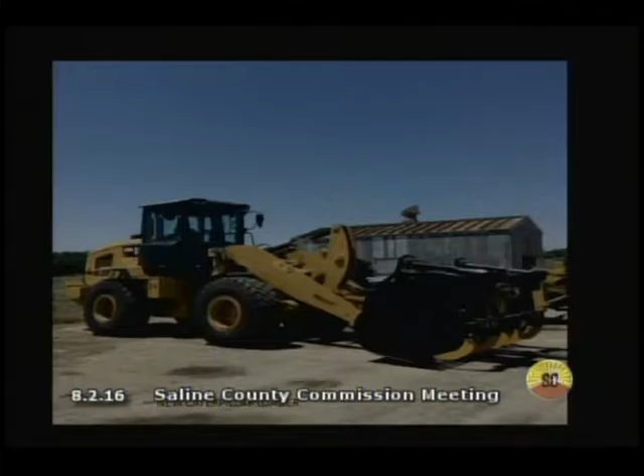We did get our new loader. It's a nice looking Cat 930 loader, and there's a grapple attachment on the front that is removable. We've taken it off, and we'll use it for aggregates this year, and then come winter, we'll put it back on and start using it for tree work.

A little bit of the activities by the rural operators. What you're looking at here is a ditch cleaning layback. It's where we take the motor grader and just put the dirt back into the field. Very effective way to do ditch cleaning in the cultivated parts of the county, saves a lot of labor and time.

This is some reshaping and recompacting of Ohio Street from Waterwell Road to Minna Road. During one of the many rains we've had lately, it got tore up from heavy truck traffic, so we had some people go over there and reshape it, putting the crown back in the road.

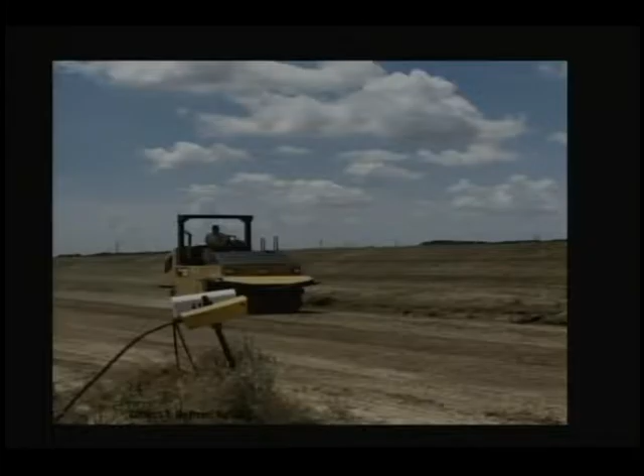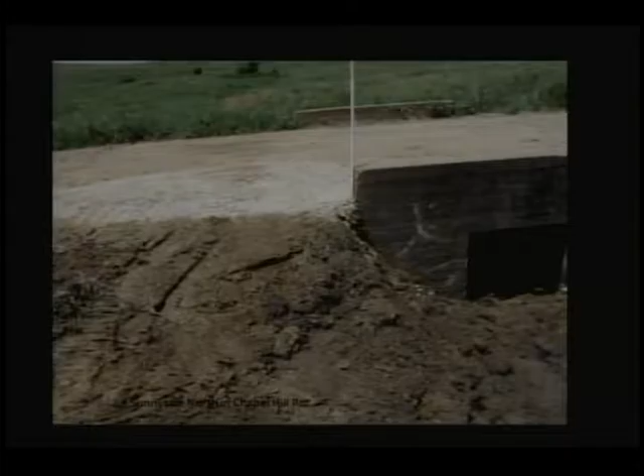Was that a new water truck there that we got recently, or have we had that a while? No, that's not a new water truck, we've had that quite a while. Yeah, that's an old milk truck. That's what it is. And we went and rented this piece of equipment, which is a pneumatic roller from Foley Equipment, to accomplish that, to seal the surface.

This is a wing wall repair on a box. The water doesn't come straight into this box. Underneath there, we buried a couple of those concrete Lego blocks to keep that from washing out.

This is on Country Club Road west of Simpson. I got a call about some overgrowth on a bridge structure there underneath, so we went over there and did some temporary work to clean the trees out and make the signs visible. We'll have to go back this winter to finish up, but at least you can be able to see through there now.

This is some asphalt work that we did on the overlays on Kip Road. When they go through there and pave, we go back and get a little asphalt and repair those drop-offs.

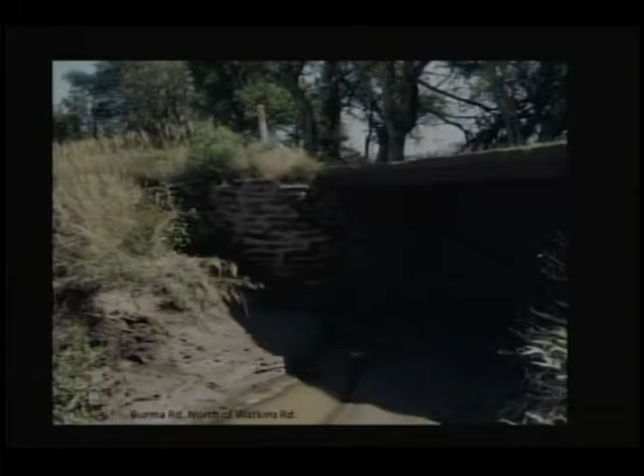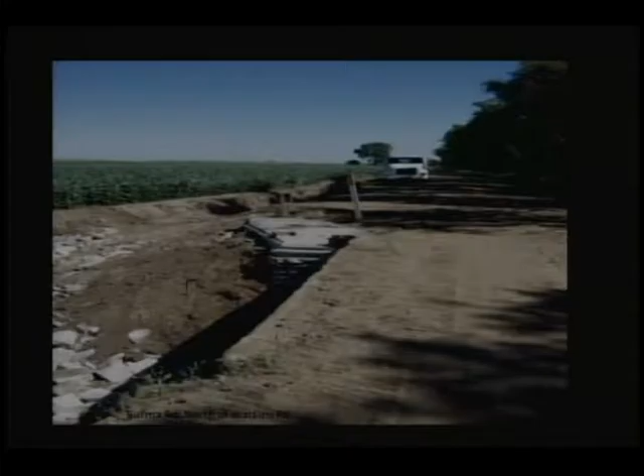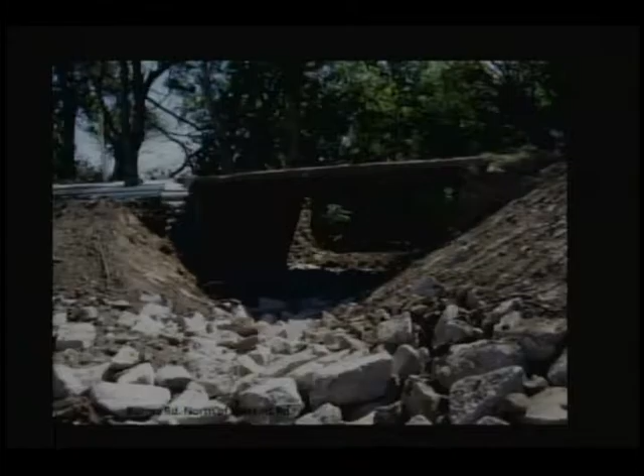This is a wing wall on a box on Burma Road, north of Watkins. It's eroding, cracked, and failing, about ready to fall off. We had some old H-pile in the yard, so we sunk some holes about 9 feet below the flow line and welded the H-pile together, put some decking in front of it, and poured concrete between the wing wall and that decking to repair it, then put some rubble in the bottom.

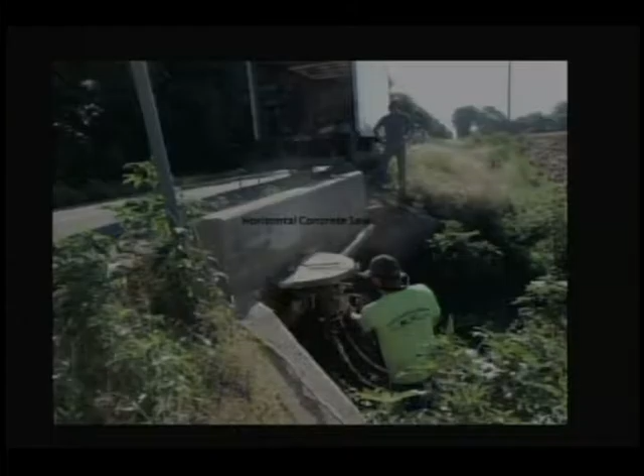This is some head walls on State Street. There were 2 of them at this location. We hired a contractor who has what they call a horizontal saw that they can attach. These head walls were built as part of the structure, so we hired them to cut them off level with the road surface, so when a vehicle does exit the roadway, those head walls aren't their problem. Just some safety improvements we made on that stretch of road.

This is a concrete culvert at Tamara Lane and Parsons. Since it's been wet, wherever we have these concrete jointed pipes, when you get a lot of heavy rains, the bells break and create a lot of potholes. So when we get the chance, we replace those with a continuous corrugated metal pipe.

This is another one, same thing - concrete pipe separated at the joints, on Fairchild south of Sundgren. We go in there and clean away from them to get the flow from the culvert.

This is a box on Chapel Hill Road, just west of the bombing range. There's a box down in there that had started to separate, settle, and fail, and we replaced it with a corrugated metal pipe.

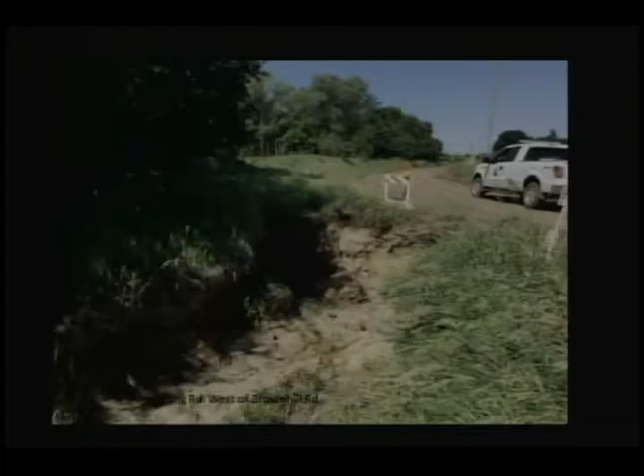This is on Armstrong Road, west of Brown Hill Road, an area prone to flooding, and it had washed out underneath that culvert. We had to dig that out, recompact it, and reset it.

This is also some of the damage from that same storm. We just went in there and refilled that, then put some of this rubble in there to help with the erosion.

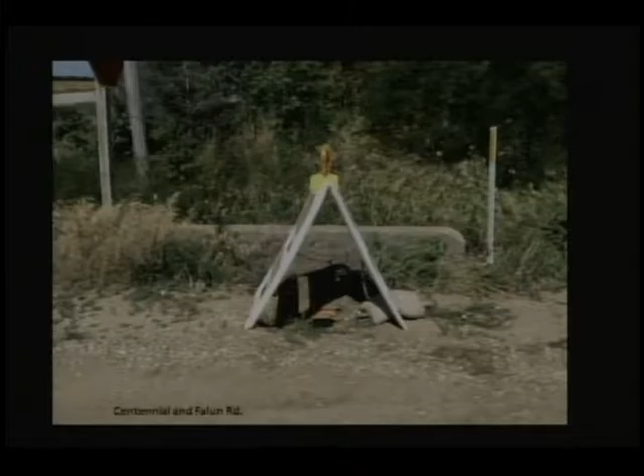This is on Centennial Road, another pipe that was failing. We went in and graded that.

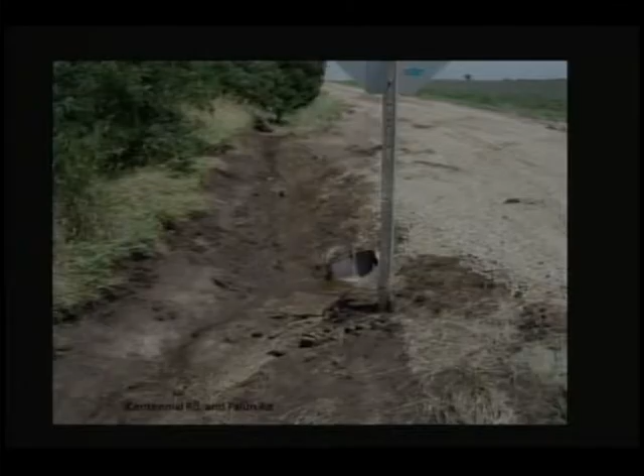This is also on Centennial and Falun. Here's a culvert that had been repaired at one time with an old aluminum sign, but since it had this concrete head wall on it, we decided it wasn't a good candidate for repair, so we went ahead and put a new culvert in, part of the safety effort to get rid of that concrete head wall.

This is on Cloud Street, west of Hedville. If you look over on the right, you can see the washed out culvert. When the heavy rains came through, it washed that culvert out, and we did a quick repair on the road. Engineering sized us a new culvert, but that one was too small, so we took the dirt out of the fields and rebuilt the road, getting the correct size culvert in there, so hopefully it won't flood across the road every time it rains.

That's just another shot of that. So we lowered the field and did a layback. When we do these laybacks, when you see our equipment out on other property owners' land...

We have their permission. We do talk to them. We don't just go out there and do it. We get their permission to perform these work activities.

This is an entrance on Humbarger, just east of Cunningham. I got a call from a gentleman, and he wanted to extend this culvert.

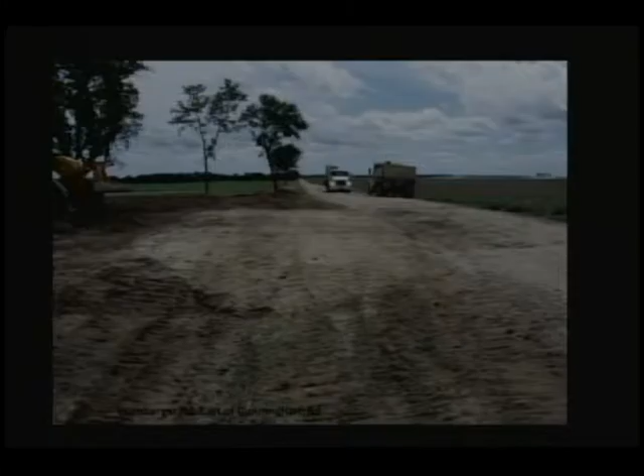And it is our responsibility if there's an entrance culvert in there. So looking at the terrain and the lay of the land there, we would have had to provide 24 feet, and then he would have had to buy a piece to put on it to make it as wide as he wants. But looking at the lay of the land and just moving this thing maybe 100 yards or so to the west takes that out of our inventory. So we built him what we call a plug entrance. It removes that asset, and nobody will ever have to go back and do any work to this again. So those are some of the things that we look at when we get these calls for culverts.

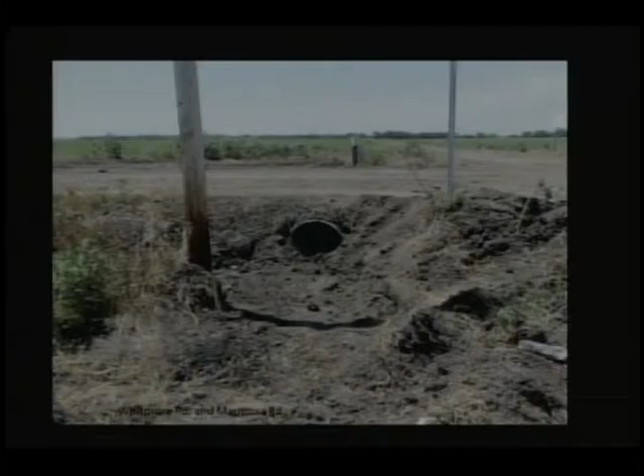This is a box structure on Whitmore, just north of Magnolia Road. We weren't even aware that this one was here. It wasn't on anybody's inventory. Something heavy ran over it and destroyed the top of that plank. But in talking with Neil, got him involved because he's the floodplain manager. This structure hasn't worked in, oh, I couldn't tell you how many years, but Neil, looking at the contours, decided that it would help the drainage in that area if it did flow again. So we used the existing concrete that this was laid on and just put a culvert back in there.

That's the end of my pictures. Does anybody have any questions?

When you get permission from a landowner, do you get that in writing? Yes, typically, not always. There are some people that you just know work well with you, and then others we have sign a hold harmless statement, yes.

Further questions? Go ahead, Commissioner. Where you're talking about that plug, was that like the one we went out to and took to the top of the hill, so it actually drained both ways? Is that a plug? Yes. Okay, I thought that was the case, because I remember when I went out to Lyle's and we did the same thing out there, I believe.

I'd suggest you get those signed anyway, because we've had two lawsuits over that. I'd get those signed, and it won't come back on you. I think it's pretty important. Yeah, I'd get it signed, because we've had problems in the past, and people that you think you would never have a problem with. I remember Mr. Tilburg, you know, we had that problem with that land, so I'd sure get that statement signed so we don't have to have all those insurance problems.

All right, Neil? These are the engineering division projects for June and July.

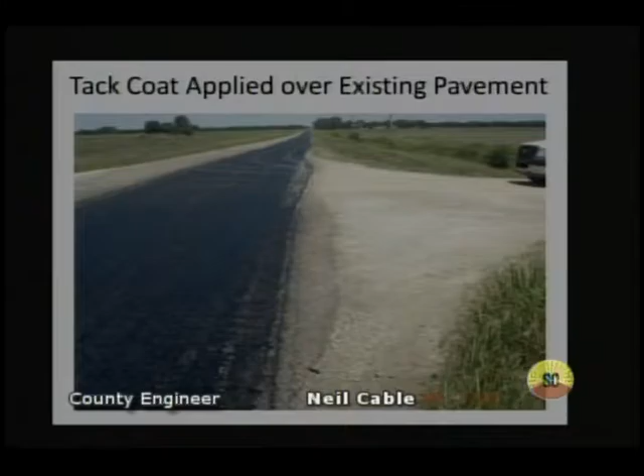Anyhow, just start with the contractual work that occurred during the last couple months, and go first to our contract with APAC Kansas for our asphalt work, project 165335. This work is on Kip Road, done in early June, and they worked up until about June 13th, I believe, when they pulled off because of harvest. They really haven't done any work since that time, so I'll go through these real quick.

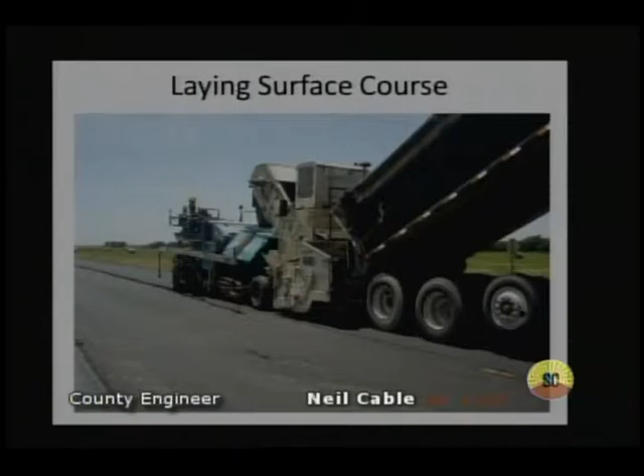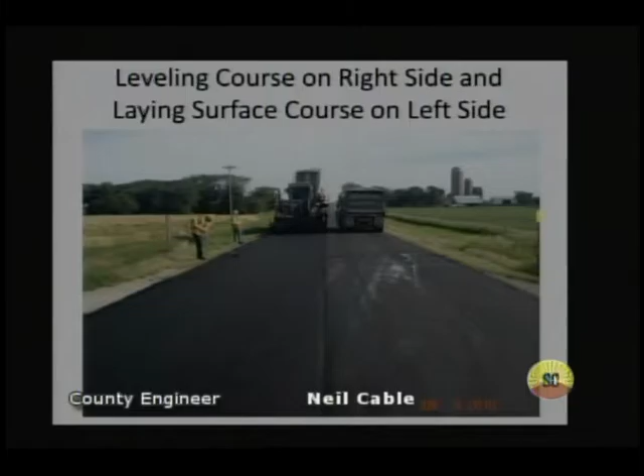You've seen this process before. It's just the application of the tack coat to the existing pavement. Then they do a leveling course to try and get out some of the unevenness of the pavement, and then come back with the surface, laying the surface course on top of the leveling course. I'll go through those pretty quick since you've seen the process before. It's always interesting to us, but a little bit repetitious, I suppose.

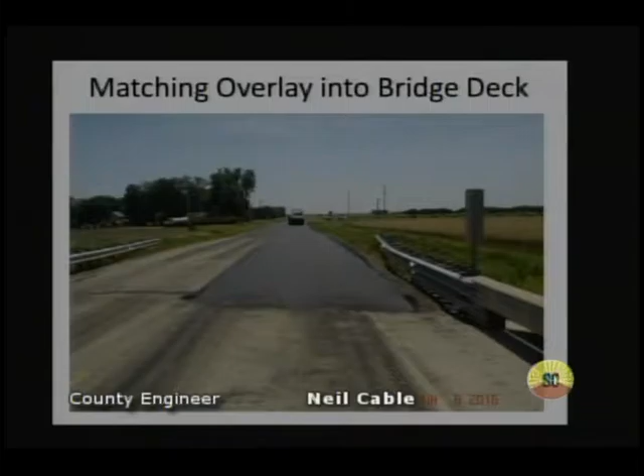Compacting the asphalt with the rollers, they went all the way from Country Club Road down to K4 Highway, about 8 or 9 miles. They matched the asphalt overlay to the bridge decks and did the radiuses, with a lot of handwork in the radiuses on that asphalt work.

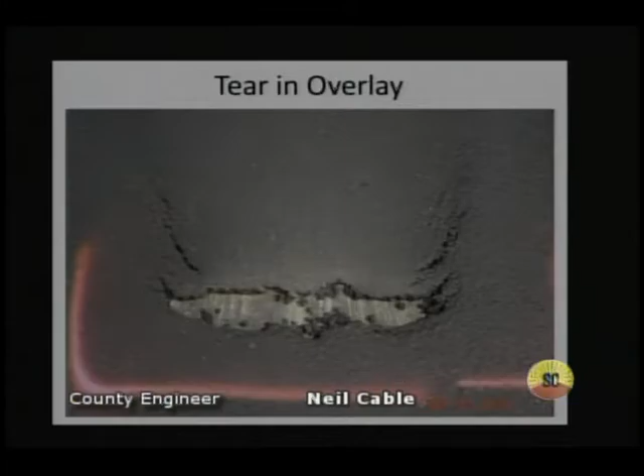We did have one area where we had some slippage of the asphalt overlay. We've had a lot of discussions with APAC as to why that occurred. It's not real extensive in 9 miles of asphalt work, but they are going to come back in and mill those out.

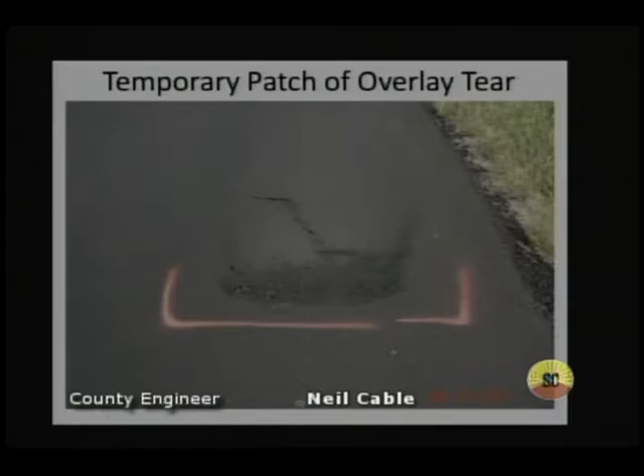There's several theories, and none of them are for sure. We used to use a different seal coat product years ago, and we've found some places where it creates kind of a slip plane at the old pavement surface, so we kind of think that might be the issue. Not entirely certain—it could be that the tack coat wasn't adequate in those areas. It's not coincident with any driveways or turning movements, just right in a straight section of the road, so it's not entirely clear.

APAC did some patching, and the county crews did some Dura patching in those areas, and they're passable right now, but they are going to be milled out and relayed. It's not extensive over that long a stretch of pavement, so I don't want everybody to think we had a wholesale failure, but we did have a couple of places that we're aware of, and they will be fixed.

Well, it was right there when all them big trucks were coming down there, and they just opened it up the following weekend. Yeah, after it more or less cured, but they pulled off pretty much and then all the trucks started rolling, so I mean we really kind of pushed that limit a little bit too much.

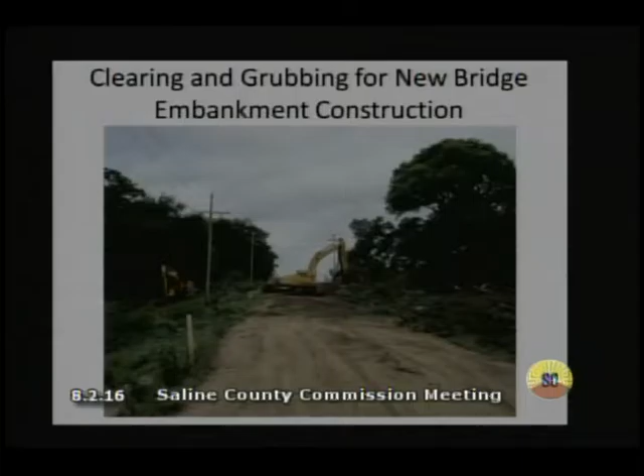This started on July 6th. They started clearing and grubbing out for the project. If everybody's been through that area, you know that's a pretty deep draw on Waterwell Road, where Spring Creek crosses Waterwell Road. They cleared and grubbed out the trees so we can build the road embankments. So I'll go through these pretty quick.

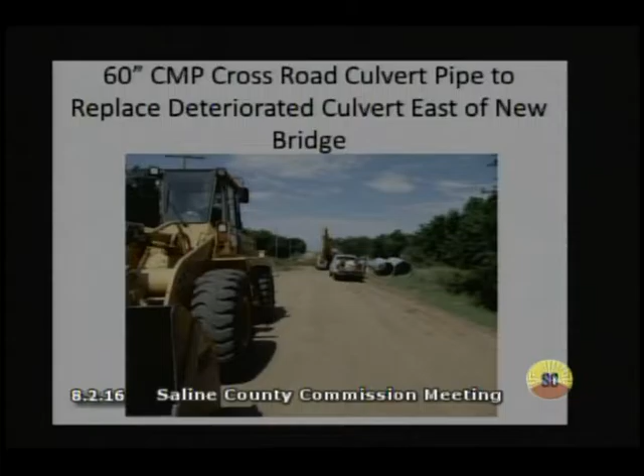We replaced the crossroad culvert pipe east of the new bridge site, significantly upsizing it—this is a 60-inch corrugated metal pipe. That's just laying the pipe, and the pipe's installed.

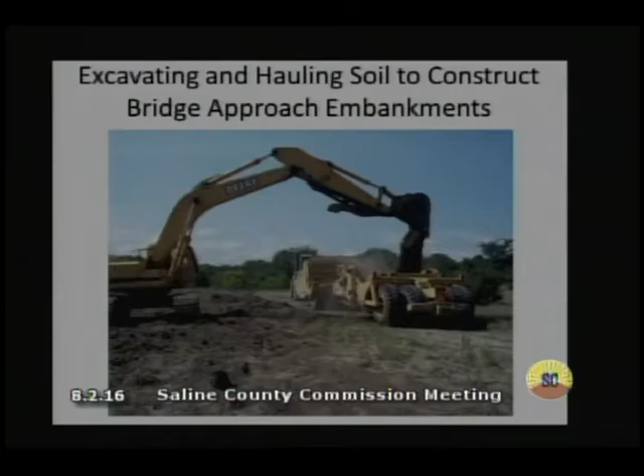What's going on out there right now is building the embankments for the approaches to the new bridge, which is going to take a lot of soil, borrow material hauled in. They've worked with the landowner to the south side of Waterwell Road and worked out an arrangement to get borrow from there. So they're currently hauling the dirt and building up the road. We have a few pictures of that—a lot of dirt being hauled in and the road being built up.

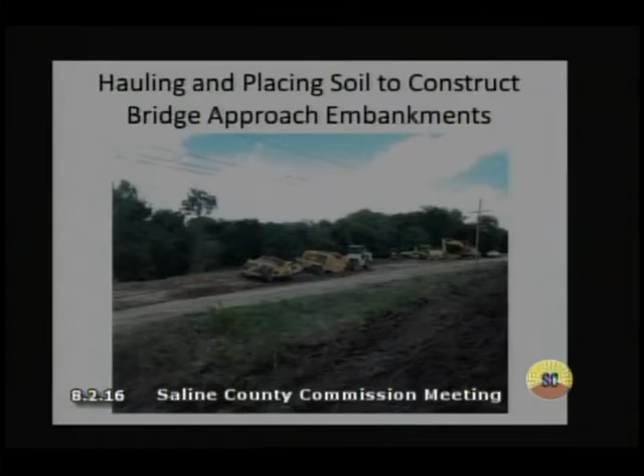That'll go on for a while longer before the bridge work starts, before King Construction actually comes in—this is their earthwork subcontractor.

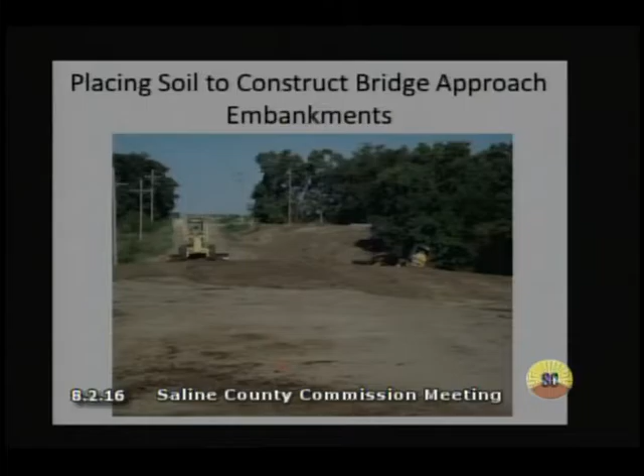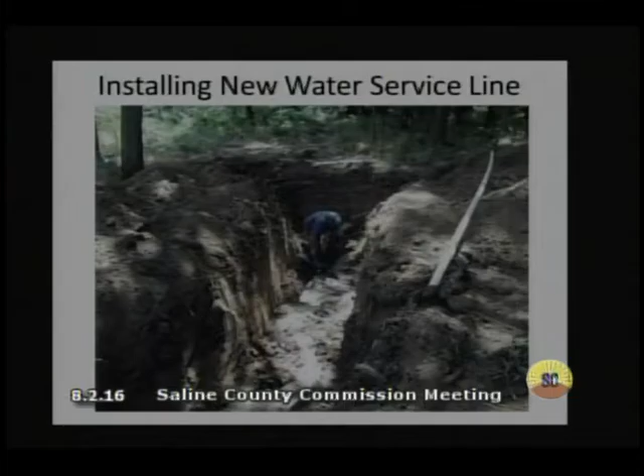Quite a raise, about 8 feet or so. The road's coming up quite a bit in that area. Also, there is a residence out there on the north side of Waterwell Road, and we had to replace the water line to that house as part of the project.

Just a few pictures of replacing the water line there. I went back to the office after I was down here this morning, and we were talking about the improvements to the shop building out there, which really didn't start until yesterday and should be in my September update. But since we were talking about it, I went ahead and put the pictures in to show you what's happening.

Also, the contractor, as you recall about 2 weeks ago, we talked about some add-on items, and we got the list to the contractor, but he's been gone for a couple weeks. So we hope to get with him pretty quick and get some prices to bring back to you on those additional add-on items. I think that's all I've got.